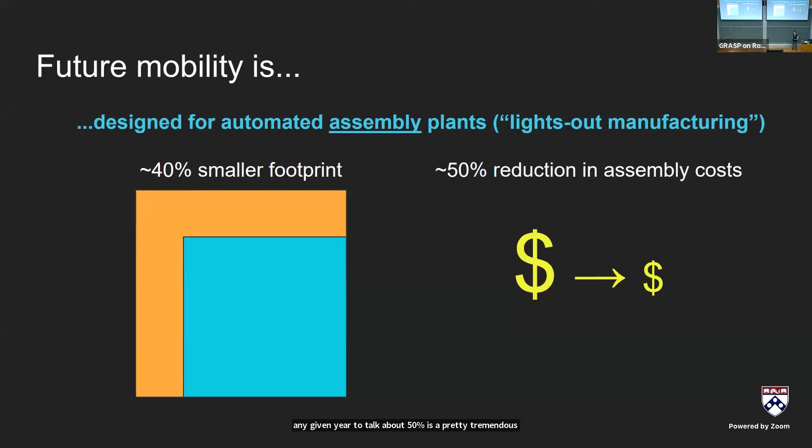I think this is going to be really important as we move into cars of the future—again, lights out manufacturing, a smaller footprint, and reduced costs.

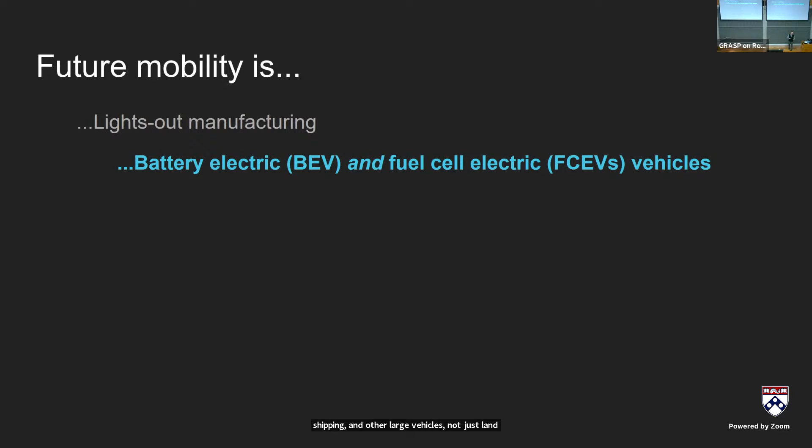Number two, battery electric vehicles are really becoming mainstream at this point, and there are a lot of examples of that. I won't talk too much about that, but fuel cell electric vehicles also have a role to play. They're less popular here in the US, but other parts of the world are looking into it, especially for trucking and shipping and other large vehicles—not just land vehicles, but trains and ships and so on.

I think there's going to be a tremendous golden age of automotive design. But the thing I want to mention is that the story is also equally about infrastructure—you have to add or replace liquid fuel infrastructure with electricity in the grid, generation, distribution, and so on, but also hydrogen generation.

I think that's one of the biggest drawbacks right now of fuel cell—hydrogen infrastructure is challenged. As it was for battery electric many years ago, 20, 25 years back, there was almost nothing. Right now more and more can be done, but infrastructure is really, really important.

Autonomous driving has been in research at least since the mid-2000s, and it's coming more and more into use. I think there's a debate about how and when—it's a matter of time, so to speak, but it's hard to pin down exactly what that is.

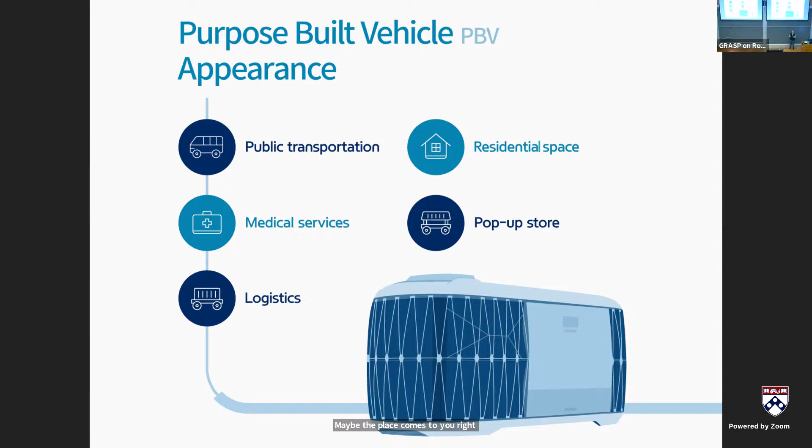But more important than maybe the technology is that you now have this question of what a vehicle can be. You can design purpose-built vehicles made for different kinds of purposes—it could be a kind of public transportation that's a moving space, or it can transport goods and equipment, or maybe it's a mobile services vehicle. Instead of you going to a place, maybe the place comes to you, through automation becoming more economically viable.

For me, automated driving is as much a fascinating technology story as it is about how we might reimagine mobile living experiences. It is transportation, yes, but it's also about how we think about how we live and how the things we need are moved around us—rethinking that is a great opportunity.

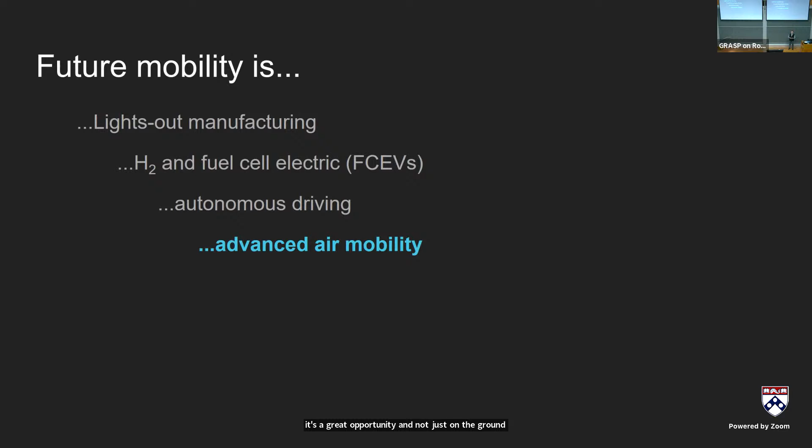And I think what's driving this push now—there's certainly a technology readiness that has to happen.

There's always been this view of the so-called 30-minute city. Any place you want to go, ideally the first half of your journey is 30 minutes or less. When you have more than a 30-minute commute, which is a lot of us, or you wish it was less, that's when you feel stressed out. When it's 30 minutes or less, you actually feel pretty good about it.

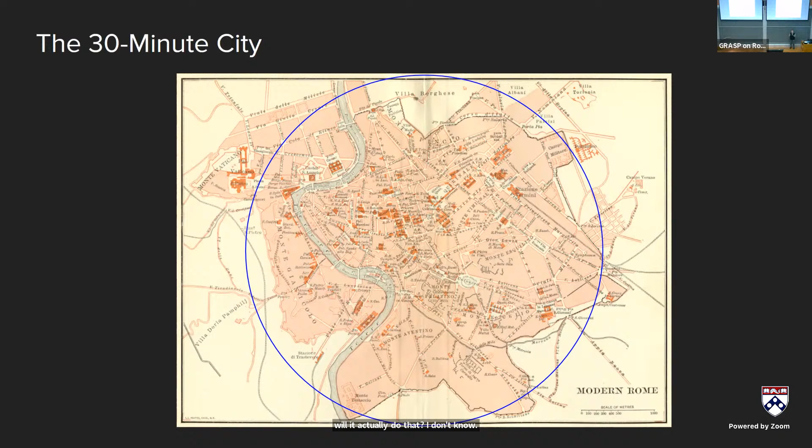I think air mobility gets us closer back to this idea. Will it actually do that? I don't know, but I think there's a pressure to try to shrink our commute times back to this idealized one hour per day.

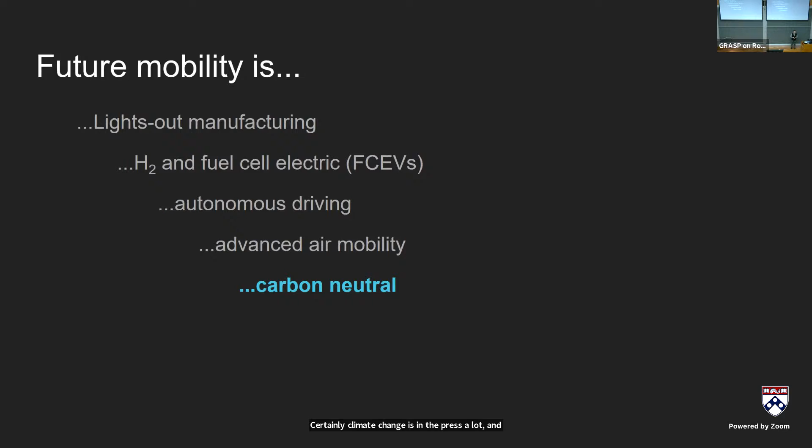Carbon neutral, certainly climate change is in the press a lot, and every industry, including automotive, has a role to play in that. For Hyundai Motor Group, there's a goal to be carbon neutral in the production and operation of our business by 2045. Of course, that's production and operation, not the fuel and energy of the vehicles and how they operate broadly. There's a lot of infrastructure per region that will influence actual carbon neutrality, but from our production and operation of facilities, we're getting to carbon neutral by 2045. The push toward fuel cell and battery electric will also play a role.

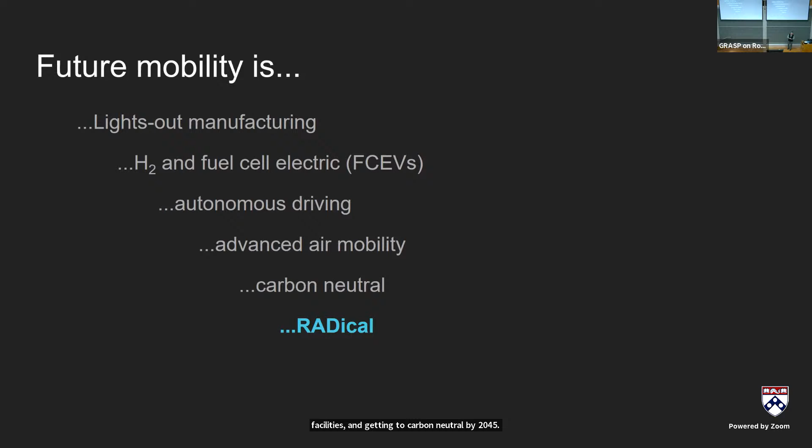Robotics is a very interesting term. I think the word itself sometimes connotes a certain kind of image in the public sense. So I like the term synthetic animation, or synthetic reanimation. Reanimation being like you take something dead and bring it to life. A machine isn't necessarily dead nor alive, but it's sort of making it kind of alive. So synthetic animation, as I like to call it, or robotics for short, since that could be a long word.

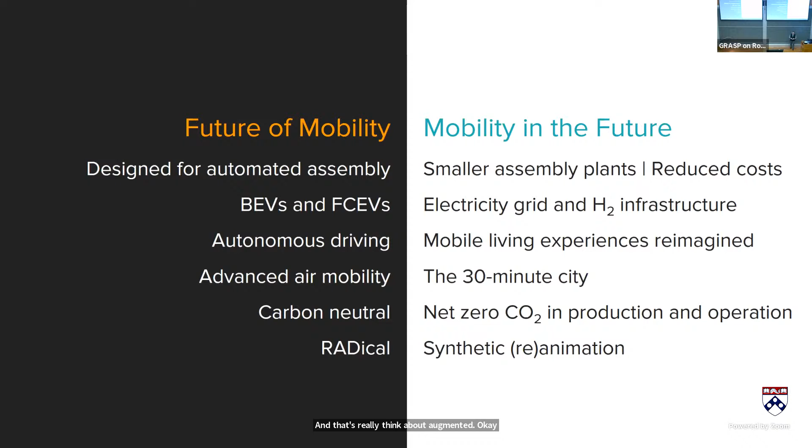In summary, to recap this first part, the future of mobility is changing a lot. We're talking about rethinking how we do assembly, new powertrains, how automation allows us to reimagine how we move ourselves or things to us. Aviation will play a bigger role, not just ground vehicles. Thinking about how we become climate minded and carbon neutral to the extent we can, and then really thinking about augmented, roboticized, enhanced design.

That leads me to the second part, the origin story for New Horizons Studio. In this part, I'll talk about how we came to be and the ability to rethink virtually everything about what is a car and how we make it.

Just to give context, the Hyundai Motor Group is self-changing. It's trying to position itself from a mere manufacturer, which is how you can describe us today, to what we call a smart mobility, smart sustainable mobility solutions provider. So it's broadening what we do and how we think about it.

In this chart, we're showing the core competencies, a lot of the traditional important things we do today like lightweighting, electrification, connectivity, etc. On the right-hand side, we're thinking about how we interface with other aspects of production, like smart factories, smart manufacturing, cities, the electric grid, infrastructure, and eco-friendliness from an operations and supply chain viewpoint. The top part references things we're branching into, like robotics, aviation, robotaxi services, and my favorite, ultimate mobility vehicles.

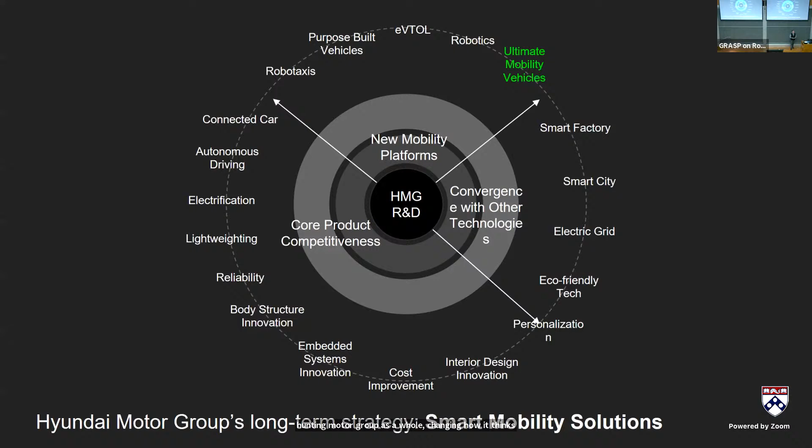This is how it really began. It began with a simple question: what if a car had legs that could walk? That was literally how the conversation started, and it's an interesting question. What if a car had legs, and what about it? What would happen? Well, I don't know. And then how would you do it? Why is it useful? Who would benefit from this? How would it work? What are the technologies out there?

As with any question, just like in research, questions beget questions. You have a question and you search for a solution that generates more questions. That's why if you're a PhD student like I was, you stay there for a long time, because more questions keep coming after questions. That's how it happened.

And then we said, well, let's look into it. Let's figure this out, or at least see what the answers could be and where they could be leading us. At this point, we weren't really sure if we wanted to do this thing or not.

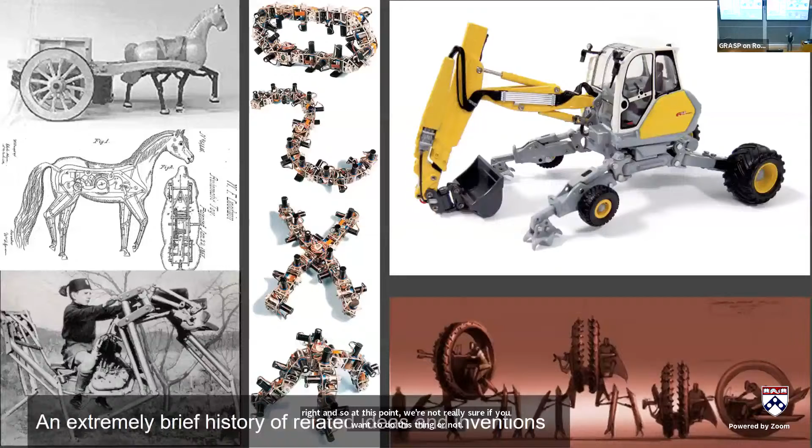So I'm going to show this picture here, and I'll put in the middle the work that Mark did at PARC, the modular robotics project that we did. It was looking at locomotion, and how you take a robotic thing and change its ability, what this means for locomotion, whether it's a snake, rolling, or walking type motion.

This idea of using shape and form to affect locomotion has been around for a long time. Some of the pictures are showing things back in, I think, 400 or 500 BC. This idea, this mechanization of quadrupeds, has been in the minds of humans for a really long time. It's definitely not a new idea.

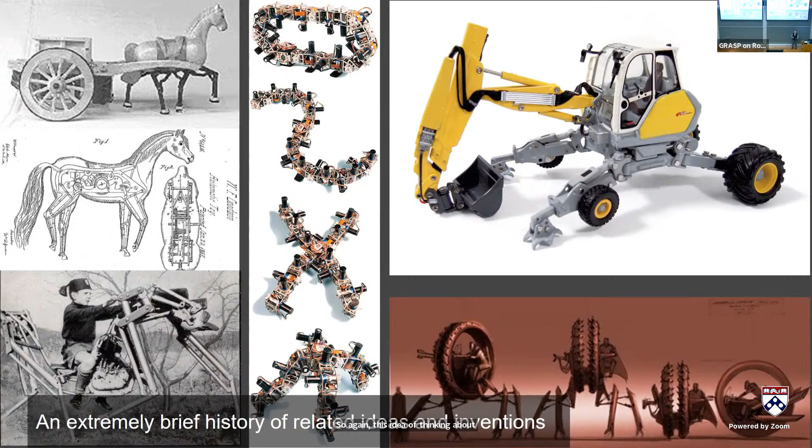People have been thinking about it. That's a toy, I believe. And there are patents from the 1800s, or actually 1900s, a patent drawing of a mechanized horse. I can't remember when that other one is from, it looks like a toy for a kid, but it is a quadruped. So again, this idea of quadrupeds has been around for a very long time, and it continues to this present day.

In the picture on the upper right is an excavator, really fascinating, there are a lot of videos of this thing. It has this articulated design, one instance of a roboticized excavator. The wheels have 2-3 degrees of freedom to enable it to work on very steep side slopes and so on. The videos of this machine are pretty incredible.

And of course, science fiction remains this ongoing set of examples of what these vehicles can be, like these cartoons from Star Wars. Every time I look around, there's this idea of how you convert from wheel to leg back to wheel again, or a combination thereof, and it's a fascinating thing to think about. And then we said, okay, so what?

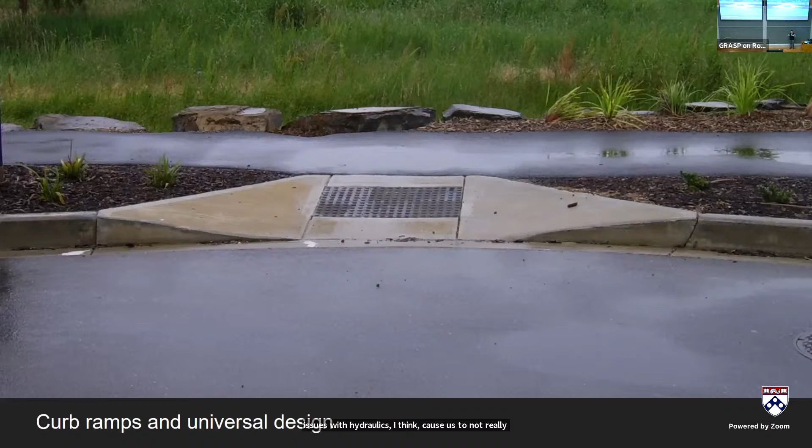We initially looked at electrohydraulics, given the extremely high power density in the actuators - it's probably number 1 in terms of power density, electrohydraulic actuation. But we didn't pursue it for long. I think some of the system issues with hydraulics caused us not to really look at that for too long. But as I mentioned, when you have a question like, what do you have if you have cars with legs and can walk, it sort of begets other questions.

And part of it is, well, it'd be helpful for those that can't get to places, so those with maybe some physical disabilities. One of the things that came across was this idea of universal design. I bring this picture up here - it's a curb cut, so there's nothing too special about that necessarily. But universal design was something that we thought would be great if we could include, to be inclusive for the broadest set of people. And if we could, that would be great.

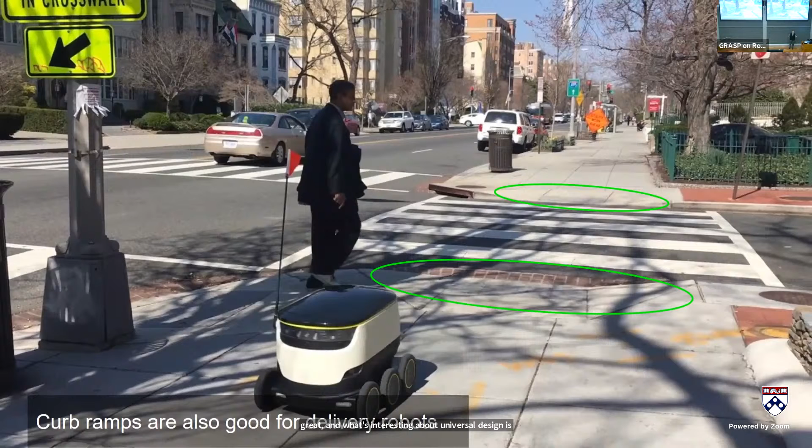What's interesting about universal design is that it is applicable to not just people, but robots too. This whole category of sidewalk robots was much more possible with a curb cut. Because if you don't have a curb cut, and you have a vehicle like that, the range of suspension and the wheel diameter makes it more challenging or impossible for it to go over the curb. For you and me, you don't even think about it, but for that robot, it would be challenging. Now with curb cuts, you make it available.

So we thought, well, what could we do to make vehicles like this more inclusive?

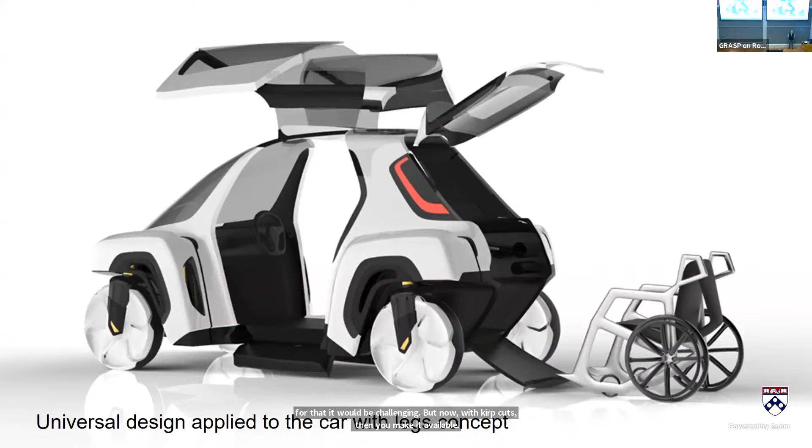So we thought, from the get-go, how do we design the ingress and egress of this vehicle so that you can get wheelchairs in and out easily? This is what I mean by rethinking a vehicle - you can rethink everything, not just its means of locomotion, but how it's designed and who benefits. Rather than retrofitting the vehicle, we can design it from the get-go. So in this case, we have a car in which you bring your own seat, I guess you could say.

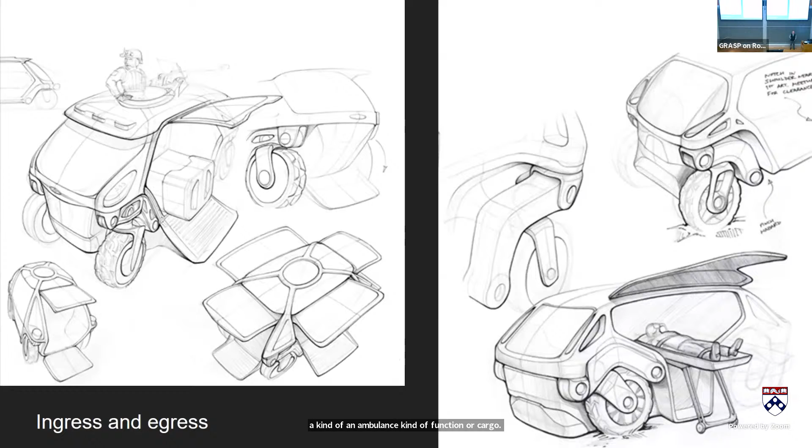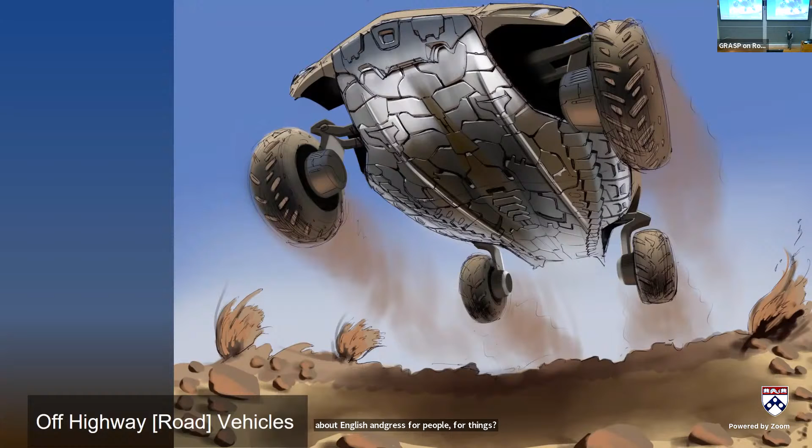It's not just wheels, it's rolling carts that can go in and out easily for different purposes. Here are some sketches about how we think about an ambulance kind of function, or cargo. Maybe we have doors on all sides so that no matter where you are in the vehicle - though there are often structural challenges that make it impractical. But again, this idea of rethinking how we handle ingress and egress for people and things.

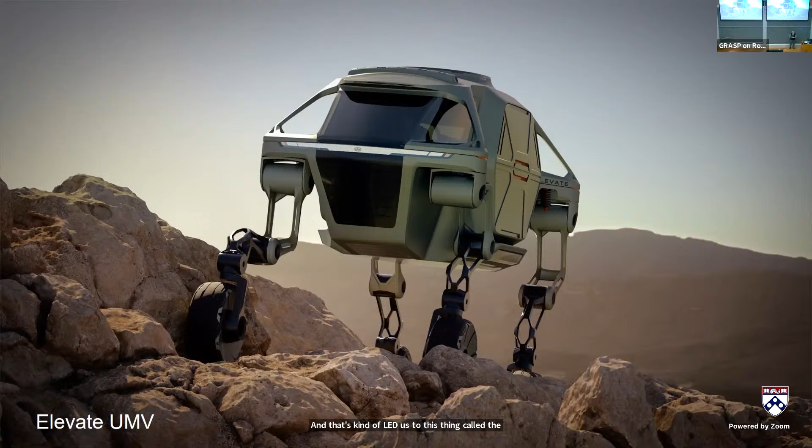Well, then we said, in reality, having leg-wheel locomotion, the case is more easily made for off-road or off-highway, off-trail mobility. So we came up with some imagery to think about that, and that's kind of where we are today - really thinking about off-highway, off-trail, off-road mobility, which led us to this concept called Elevate, which we released in 2019. This picture is much more of a vision, an aspirational design. It's not something we're working on directly right now, but it represents how, if we can get here one day, it would be amazing. Obviously there are a lot of difficulties getting there, which I'll talk about in just a bit.

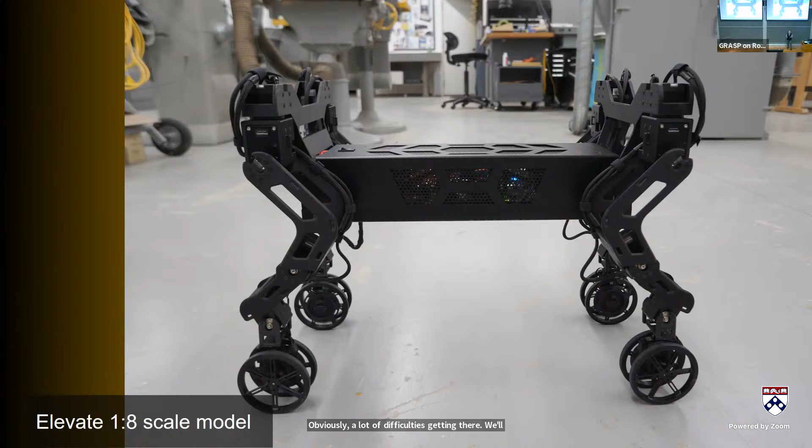Now, much smaller, we took about a 1/8 scale using off-the-shelf actuators and put something together that demonstrated, at least at the 1/8 scale, some of the locomotion capabilities of walking, both in mammalian style, reptilian style, and so on.

What was interesting was scale. If you think about animal design, scale really becomes a thing. So for us, the question is, what is the appropriate scale relative to the available or projected technology to make a vehicle like this? Smaller is easier, maybe, but when you get smaller, maybe less utilitarian because it's smaller. And when you get larger, more utilitarian, but harder technically to implement. So right now we're trying to figure out the design space - how big, how many actuators, what's the configuration, etc. We haven't yet determined what the actual scale of the vehicle will be. We have a sense of what that is, but it's still not a settled question for us.

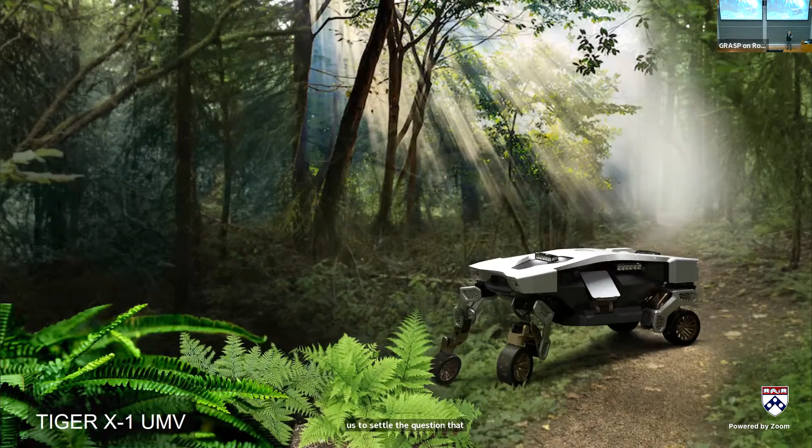The uncrewed version - the model led us to think about an uncrewed version. So we had a video called Tiger X-1, which is out there on the web. It allowed us to think about an uncrewed version carrying cargo, equipment, and goods for doing various things - goods delivery, surveillance, monitoring, a science platform, etc.

And then we thought, okay, a vehicle like that would have a hard time getting to a remote location, because if it's designed to go to remote, inaccessible areas, it would take a really long time to go from the base camp to its mission site. So we thought, why don't we carry it by aerial vehicle? This combination of aerial vehicle and ground vehicle is fascinating - I know some of you might be working on that problem. It's a really fascinating combination, using the best of both: aerial mobility for speed and efficiency to location, and a ground vehicle to effectuate some kind of ground mission, then working the two together.

So this also remains a bit of a vision and aspiration for us. We're not yet working on this combination, but we believe that the developments happening today in things like air mobility and in our vehicle will converge at some point, not in the too distant future. So I'm really excited about this one.

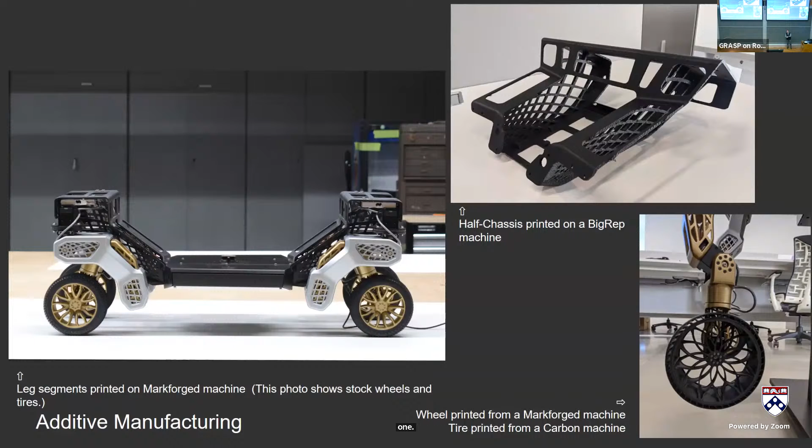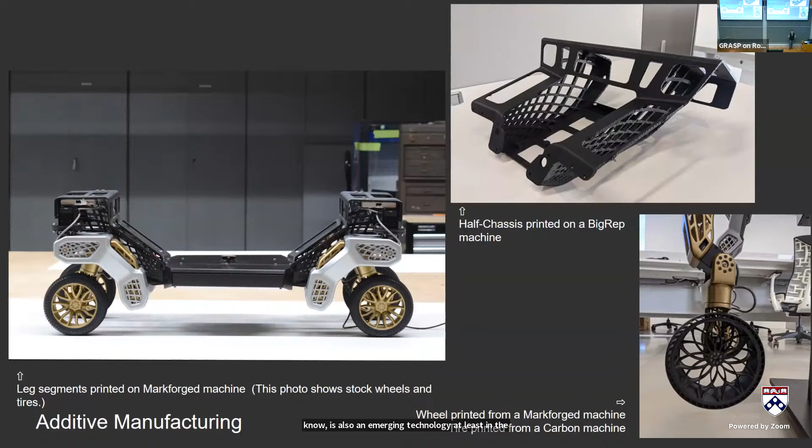I talked about earlier in the first part about manufacturing. And additive manufacturing is also an emerging technology to some degree, at least in the sense of production. The ability to consolidate design so that you have something using the least material for the function, I think is really a fascinating prospect.

So we looked into it, looking into off-the-shelf technologies in this case, which aren't necessarily for production, but it helps us think about how we use this technology to create the function for the least material. And not just that, for us it's really about everything from the viewpoint of like X to mass ratio.

So strength to mass ratio, torque to mass ratio, power to weight ratio, everything to weight ratio is a factor. And the question is, how do we use the best in modeling, design, and optimization, consolidation of functionality to get the most out of the least? And how do we do that in a way that's practical?

Again, it's a part of the design thinking from the get-go. If you do it later on, you might miss opportunities if you think about additive later on. I think if you think of it in the front end is where it really needs to happen. That's one of the challenges overall, I think, the separation between design and manufacturing.

In design, you don't necessarily have the skill set or experience in manufacturing, and vice versa. I think there's an opportunity to try to bring those two worlds even closer together. And it's a topic in and of itself.

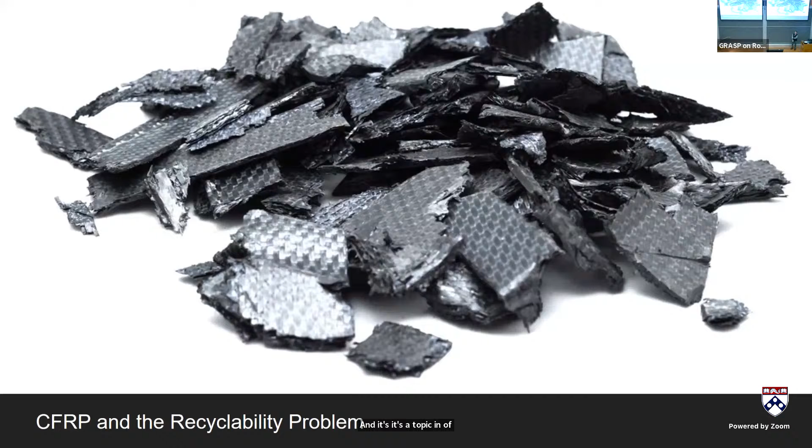Another area that was really fascinating for us is carbon fiber reinforced plastics, or composites for short. Amazing material in a lot of ways, but there is a recyclability problem. Right now, I don't think you can recycle carbon fiber. So if this were really to scale up, you'd have a lot of parts ending up in landfills.

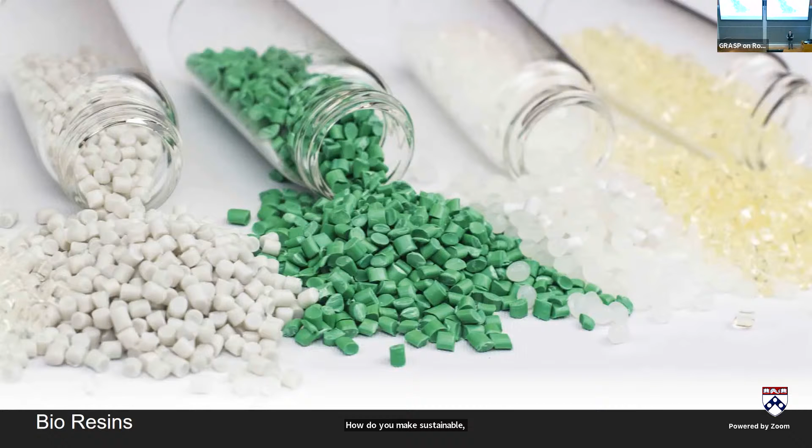And this is, I think, the pending problem of the wind turbine industry. They have a lot of these blades that you just somehow put in a landfill, I think, or something like that. So they too are actually thinking about how you make sustainable composites. And one of the ways would be to think about how we might use plant-based resins and fibers to do that.

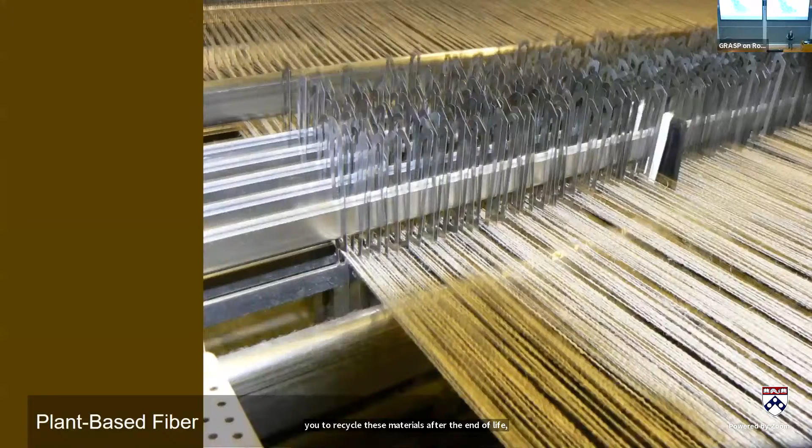There's definitely an industry effort to look at plant-based fibers. It doesn't have to be plant-based, but it could be things that would allow you to recycle these materials after end of life, one of which is through bioresins. It's not the only way, but that's certainly one way. And then the corresponding technology would be fibers, so there's hemp, flax, sisal, and so on, looking at how you industrialize plant fibers into yarns and fabrics that are industrial grade.

That means consistency, quality, known properties that you can engineer to. There's certainly a gap there, I think, but I think the most developed so far is flax. And flax you can get into pre-impregnated sheets that you can put into carbon composites, and we have used that a little bit.

But on the other hand, it's like the properties of that—how do you engineer that in with predictable behavior? Now, one great thing about the plant fibers is that it provides greater toughness to carbon fiber, because if you hit carbon fiber today, you might crack it and never know. But with plant fiber, it would actually provide greater crash resistance or impact resistance. So that's really attractive for things that will be on the road.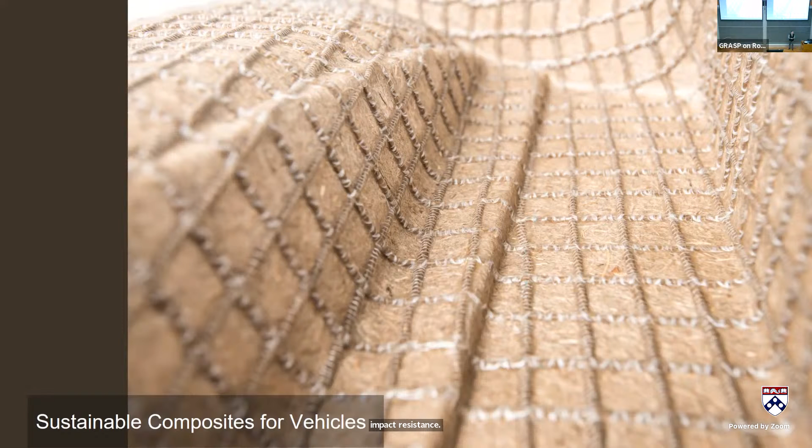So again, looking at how we think about sustainable composite materials for vehicles is a huge undertaking that we don't have the resources on my team to look at, but there's certainly a lot of effort into that.

And now for doing this interesting, weird, expensive vehicle, why would you want to do it? There's this book I read years ago called Purpose-Driven Life, and I thought about that—how do we do purpose-driven design? Why are we doing this beyond the incredible technical opportunity that it represents? So I think of it as technology enables, but what purpose are you doing whatever it is you're doing?

And I think there are a lot of reasons, and among them I kind of highlight here: how do we adapt to a warming world? If you have a warming world, there are probably a lot of things that happen with that, and how might our vehicle be a part of this? I don't want to say solution, but the adaptation to a changing, warming world. And space resources.

There is, at least in the US, a kind of renewed push to get to the moon and beyond. So how might we think about the interest in developing space resources for our benefit.

Wildfire is one of the impacts of climate related change among many, and there are a lot of issues to contend with. Wildfire season is certainly expanding. Whenever there's been a lot of rain in California, which is a double-edged sword because we need water, but then it promotes plant growth, which is good. But then if you have a dry year, that plant growth dies and you have a lot of fuel that becomes a fire eventually. So it's this kind of seesaw that I think we're in for quite some time.

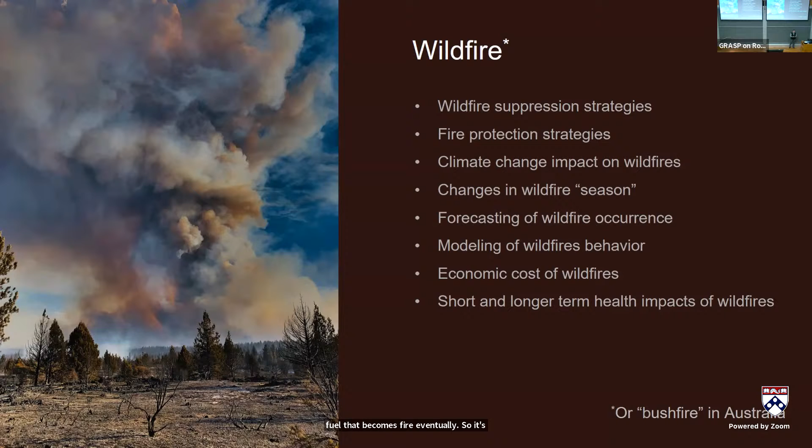The thing that's happening in a lot of places is you have people living in and near wildland. If there's a fire in the middle of nowhere, maybe it's okay to some degree, but if it's affecting people and structures, then it's a real issue. Livelihoods get impacted, so dealing with this more and more is going to be an issue.

The people that deal with it are fire crews, and the tools they have are saws, axes, chainsaws, and that sort of thing. That's basically what they use. So how might we use a ground vehicle to help with, not necessarily the firefighting, but supporting it, with vehicles that can go into the terrain and have the duration that they need to fight wildfires. That's a question we have, and I think there's opportunity there.

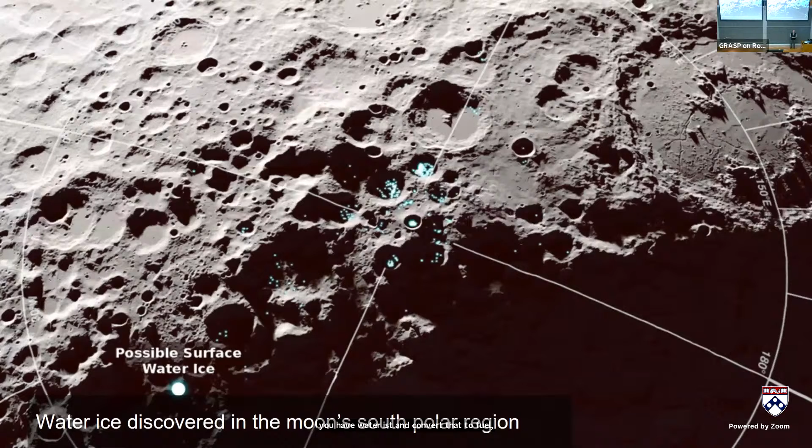Switching over to space resources, ever since Apollo there's been continued research on what's on the moon, including the discovery of water ice in the last, say, 10 years. Fascinating development. This is a picture of the South Polar region. They have verified the existence of water ice, and once you have water ice, you can convert that to fuel, oxygen, water, and then breathable air. So there's been a push there.

Now, ground vehicles are going to be needed, because the Apollo missions have shown that once you have a ground vehicle, your ability to travel is greatly enhanced. So there's no surprise there. If you have a car, you can go further away. So if you have a car on the moon, you can go further away too. The thought is that if we have a vehicle that can go into more places than what the lunar rover did back in the 60s and 70s, it's been that long. But the distances they've been able to go is pretty amazing.

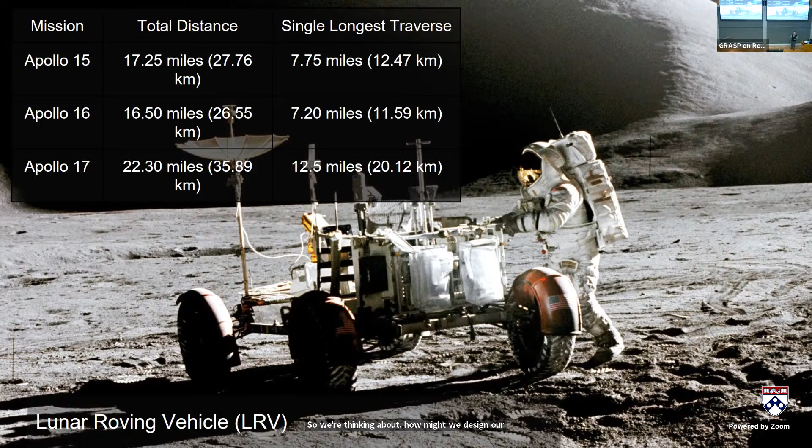So we're thinking about how might we design our vehicle for lunar mobility applications, specifically in the area of construction, not just exploration, but really in construction, which I'll highlight in just a bit.

The other reason for being on the moon is not just that it's further out, but the existence of helium-3, which could be a fuel source for fusion, which of course is still a big area of research that's not settled yet either. But if you can get fusion with helium-3, the excitement is that you have no radioactive byproducts from the fusion reaction. So you have this very, very clean source of power potentially. You're fusing elements and there's no radioactive byproducts, so it could be tremendous. And it's right on the surface — within 6 inches of the surface there's a lot of helium-3 from the solar wind interaction with the surface. It's just sort of there, you scoop it up, and then off you go with a fusion source.

Wrapping up this section, science fiction has kind of been a source of inspiration. Lots of things have been in the movies and books and now have come to pass. I have a coming soon section: flying cars, space elevator, FTL. That's probably way, way out there.

But I like to call it collaborative mobile autonomy, and I really think this is where I'm really excited about robotics in general — collaborative mobile autonomy, which is a long way of saying how people and machines interact in a natural way. There's all kinds of technologies coming together. The funniest example I can give you is a movie called Robot and Frank, which came out about 10 years ago.

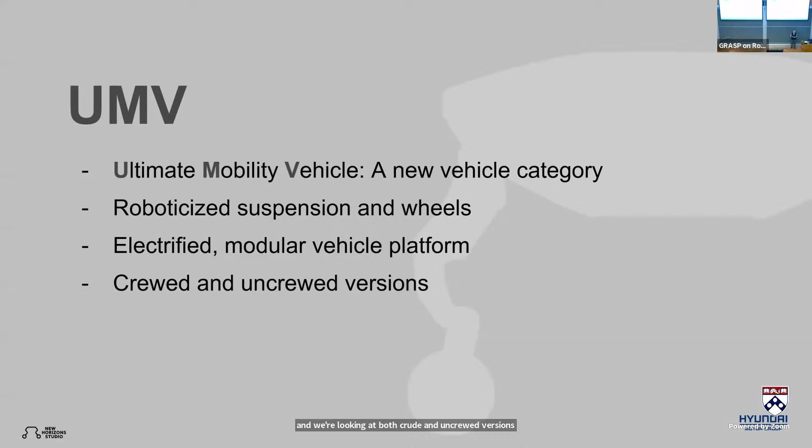Before that, let me talk about where we think this can be useful. There are 4 big areas: natural resource management and emergency response. There's a lot of things that happen off-road, so rangeland management - a lot of the middle of the country dealing with cattle or farming is literally not on the road. I think there's a lot of interesting applications there. Search and rescue, as I mentioned early on, we identified that as a really great area to look at.

Not necessarily from a market viewpoint, but from the use case scenario - how do you get into extreme situations and provide mobility in that context - is going to really stress and push our design to another level.

And I mentioned wildfire fighting and crew support. Next is construction mining. Obviously, there's a lot of work in construction robotics in the building sense.

But how do you get up and down stairs and go through a constantly changing environment to deliver goods or provide equipment to workers? Civil infrastructure is a lot like highways, bridges, things that span quite a bit of space.

So having a vehicle that can go further and do similar kind of construction work, but across a larger area. And then of course reality capture, which I think is one of the leading applications today, both in construction and mining.

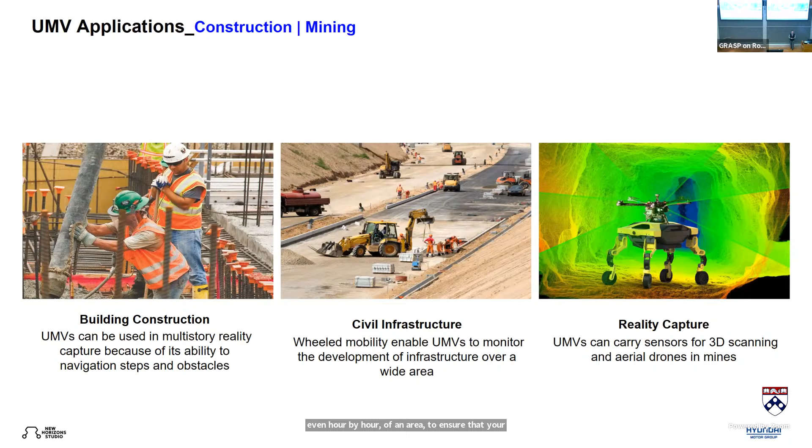It's like, what are the changes day to day or even hour by hour of an area, to ensure that you're monitoring and measuring the progress of a construction site or a mining operation.

Third area is goods delivery. This one, obviously, I think from a robotics viewpoint, is probably one of the major areas that we're looking at. At first, I wasn't thinking about urban delivery, but somebody pointed out to me there are still a lot of cities where there's a lot of steps.

You don't have curb cuts or ramps, right? And I think I've noticed that the cities in the east, compared to the west or southwest, there's a lot of steps that you have to deal with. And so it's like, yeah, okay, that makes sense.

And so maybe not to the complexity that we have here, but the ability to have that articulation on the wheels could be really important. Remote access areas, again, areas that are probably unimproved, may not have maintained roads, that can be important.

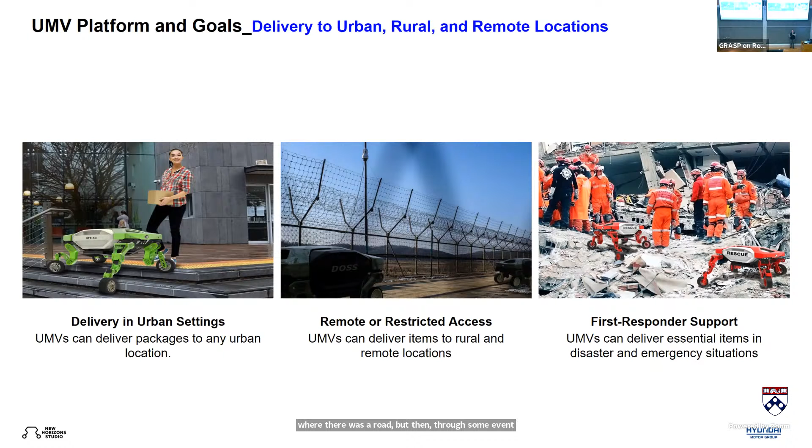And then first responders, similar to the very picture I showed very early on of a vehicle going into an area where there was a road, right? But then through some event, that road is now gone, or obscured. And that could be really important. You still have a human element, but you're delivering and supporting those humans as they do their work.

And then fourth and final is space resources. And this is, I'm really excited about this opportunity, because then you have this idea that there's lots to learn from going to the moon, and then lots to do.

And then if you want to have a human permanent settlement, not just spend a few days and come back, then you have to build habitat, you have to build infrastructure and so on. So things like how do you create landing pads, habitats, power and data infrastructure, and so on.

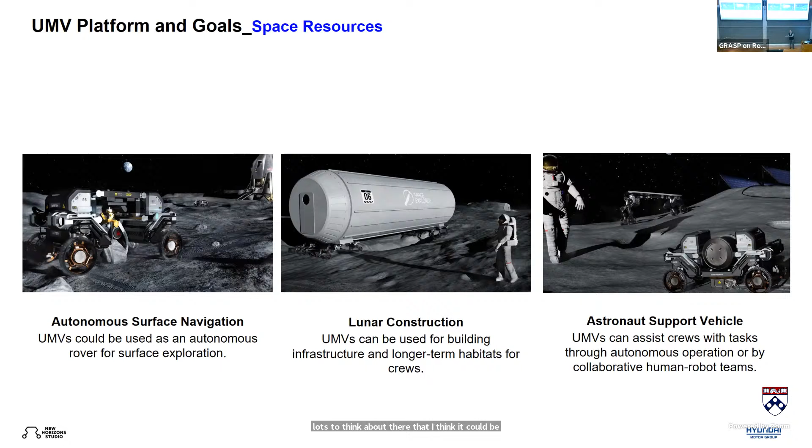So it's a huge undertaking that I think is, lots to think about there that I think it could be really exciting. And the fact that there's no roads there yet makes our vehicle, I think, intuitively more sense to be there.

So right now we're working on two types of vehicles. One is the smaller uncrewed vehicle, we call it the X1A. It's a micro UMV. And then we have a larger vehicle, we call it mini UMV. Mini from the viewpoint of being small compared to your typical car.

The micro UMV is about 100 kilogram or less vehicle, and the mini UMV is anywhere between 400 to 800 kilograms, which by automotive standards is a very lightweight vehicle. The cars are in that...

2,000, 3,000, sometimes 4, 5, 6,000 pound vehicle. So to do 800 kilograms is a lightweight vehicle.

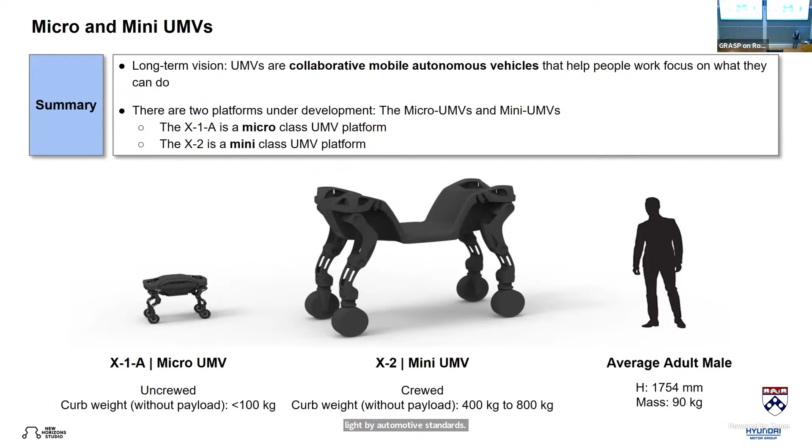Not as lightweight as a Formula One race car, but it is relatively light by automotive standards. So again, the micro UMV is for uncrewed applications and mini UMV is for crewed applications.

So this is again to elevate, again this is the aspiration that we're trying to move to. And where we are today is still thinking about, I want to show these pictures because it's the idea that we're trying to make a car. We're still trying to make a car at the end of the day.

Car with roboticized suspension. So in here, it definitely looks like a car, but the roboticized suspension is somewhat hidden. And that's the idea, that we want to incorporate the aesthetics of the leg design, if you will, or AHROMS, with the vehicle. And the two can play together.

So it's still very much a robot. You're looking at a robot, but you're looking at it in the form of a four-wheeled vehicle.

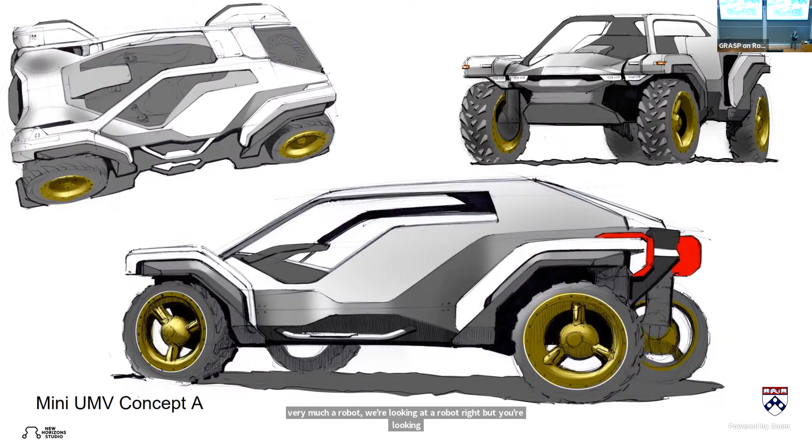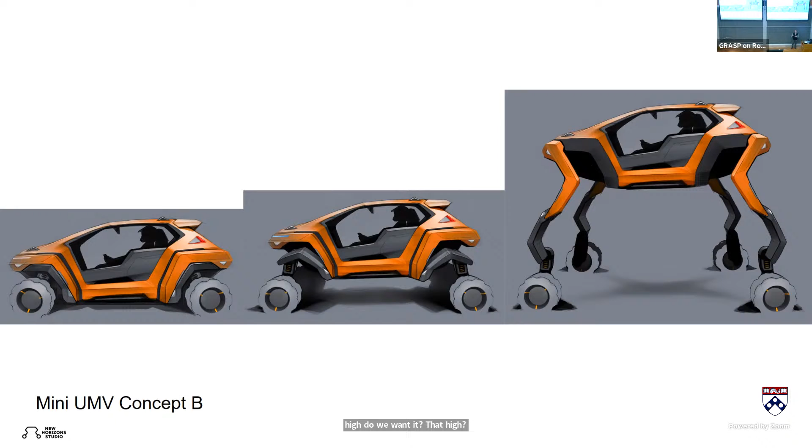Here's yet another look at the styling of this vehicle. We're still going through these ideas. Now where we're focused is what we call the adaptive high range of motion suspension.

This is a picture of, actually, a 6 degree of freedom leg, if you will. There's 5 in the leg, and then there's the powered wheel. This is just the mechanical assembly of what we have today. With the people there, it gives you a sense of how big this is.

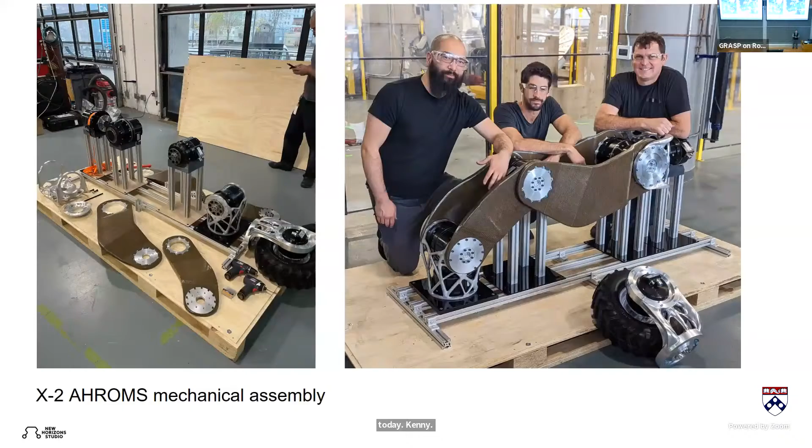We've since put it on a vertical test stand, which is where we're at today. I call it a squat rack, so if you can imagine going to the gym and there's a squat rack, that's what this is. You can add weights to it, and we can test out the squatting strength of this system. In human performance, a squat is a measure of your core strength, and we're trying to do the same thing.

It also gives the ability to design the sequence of motions of the hip, the knee, the ankle, and the wheel to create that lifting motion. It's not just one joint, it's the coordination, just like in lifting. How you coordinate all of your joints makes a difference, and your posture and everything. So we're trying to discern that as well.

What is the appropriate sequence of torques in each joint to get us the lifting motion with the least amount of power, or the fastest, and so on? We haven't figured that out yet - that's something we're trying to understand better. It'll depend on posture and a bunch of things. We're also not sure if it's 6 degrees of freedom, or 5, or 4 - that's still a question too. We don't know if it's a serial chain or a serial-parallel mechanism. Lots of questions we don't know yet.

Now we have the electrical side. If you've built robots, I'm sure you're familiar - once you add wires, it really gets interesting. Same with us, because wires change your mobility. Are the wires interfering? Are they twisting? We have the same problems and we're trying to figure it out - what's the appropriate arrangement of the wires, even where the wire comes out of the actuator. Is it on the side? Is it through the middle? All those things we're still trying to figure out.

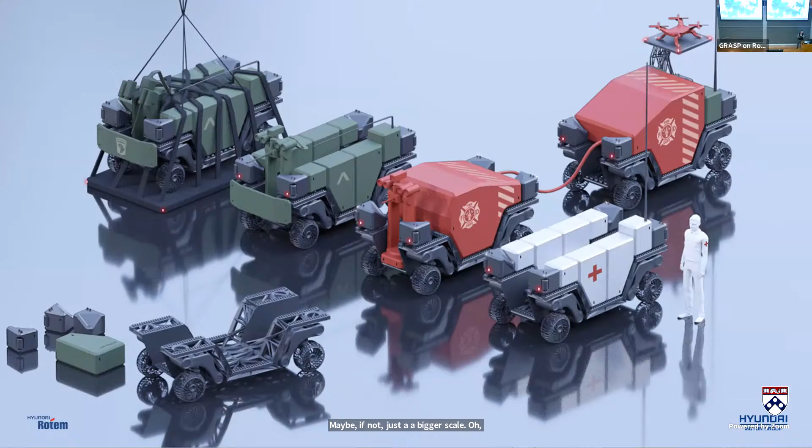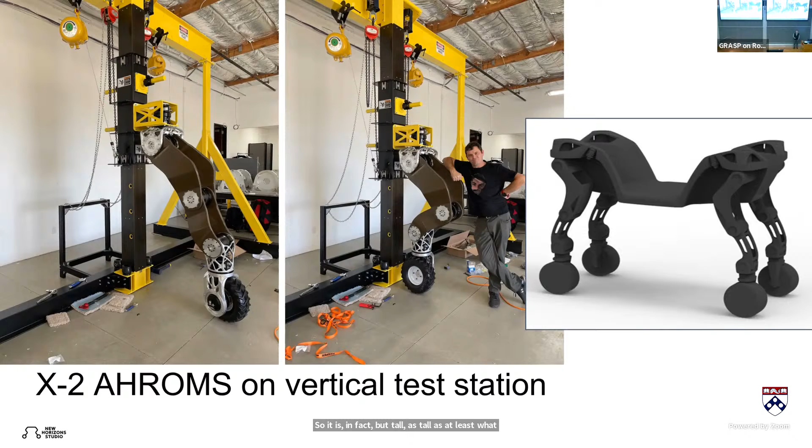Just finally, the previous picture shows you the scale. You can see, especially in this picture, that person gives you a sense of how tall that is and where we're going with it. It is in fact about as tall as, at least where the hip is, the height of an average person.

Again, some concepts for what that can do. I want to wrap up with some pictures here of the X1A, highlighting lunar applications.

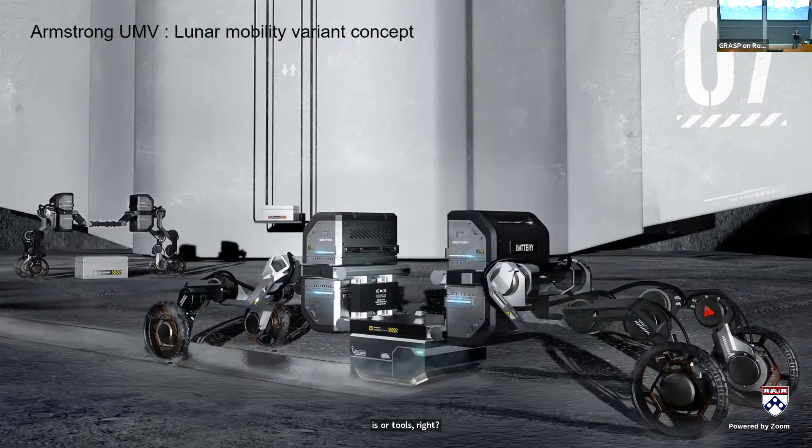And here is the ability to reconfigure the vehicle to lower it, to again, do certain things. So I think there's a lot of interesting things going on.

Finally, habitat building. You can't quite see it, but there's like 4 of these machines carrying this habitat. The good thing about lunar is that you have 1/6 G that gives it the ability to carry more, if you will, compared to Earth. And so because the torque to mass ratio is really important, it gets better on the moon. So moon would be a great place to have these vehicles.

The difference being that you have now wheels, and the incorporation of wheels and legs together, I think, is from what I can tell, yes, it's been research on leg and wheel locomotion, but I think there's a lot more that could be done. I think this is where we could need help in understanding the dynamics of rolling traction, powered rolling traction, and then leg motion. So I think that combination is fairly less research. Definitely less research than pure quadruped and pure rolling motion, whether wheel or track.

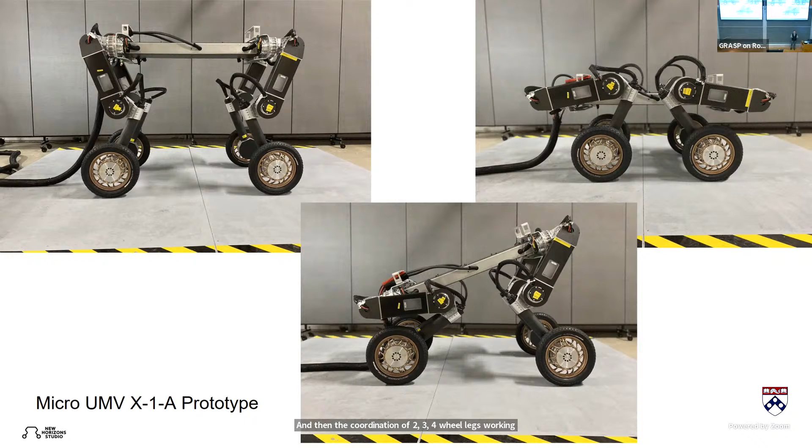Now, in addition to the locomotion, we have the ability to articulate the chassis. And I'm gonna give a shout out to Mark as well, because this idea of reconfigurability and modularity, I've kind of carried ever since my days at PARC. In this case, it's an articulating chassis that can go from arch to flat to this tub.

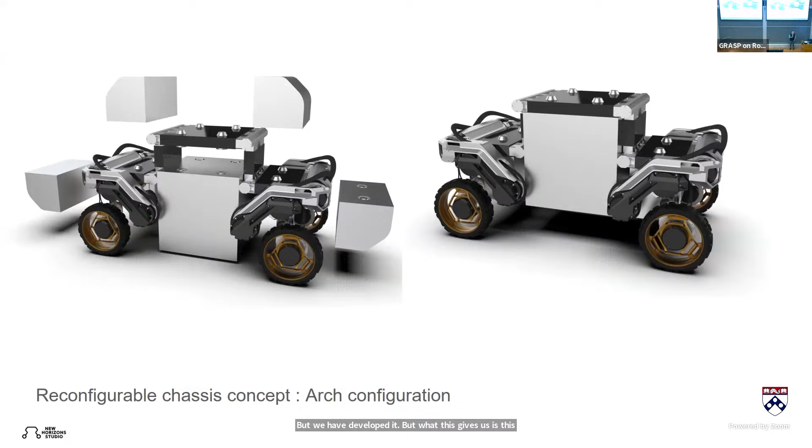But what this gives us is this idea that you can have different kinds of cargo. You can have cargo that the vehicle can kind of roll over and pick up from the bottom. As shown here, you could have different pods to attach and detach from that. You could have it top loading. You can have it so that the chassis is more of a tub format, and then the human can just put something on top and have it go on its way. So there's different use cases for different shapes, and this allows us to explore these kinds of possibilities.